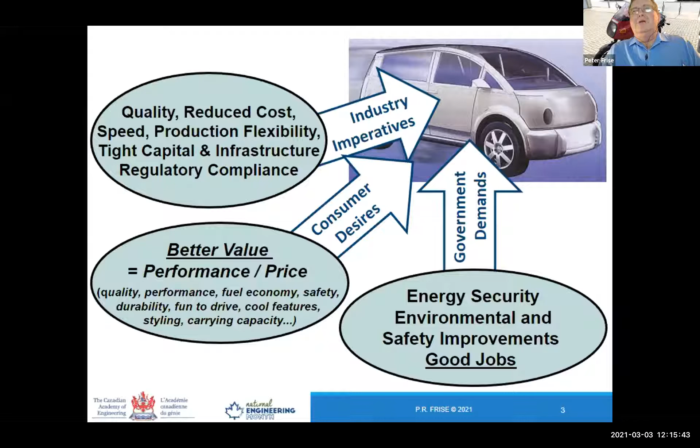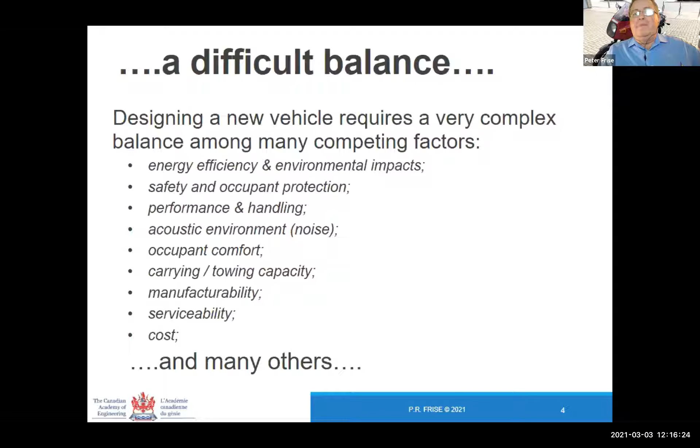So this is a very difficult balance. Designing a new vehicle is a complex balance among all these factors: energy efficiency and environmental, safety, performance, creature comforts, sound capacity, how much noise the car makes inside, its ability to tow, how easily can it be made, serviceability, and cost. These factors all have to be balanced. And of course, as engineers, this is our life. We have to balance different factors and make sure that we are properly meeting the needs of our customers.

So we're going to talk about a new term that's been coined: automobility. What is it? Automobility is the secure zero-emission movement of people, goods, and services using advanced information technologies. Automobility — we're sort of moving from the automotive industry to the automobility industry. And it's a symbolic word, symbolic of a big change in technology.

To a large extent, if you go out to your driveway, the car that's sitting there, unless it's one of the few, relatively few electric vehicles that are around, that car is fundamentally not different from a vehicle that was built 50 years ago or even 70 years ago. It has four wheels, it has an internal combustion engine, it has a transmission, body's made of steel, and so on and so forth. But the future vehicle is really going to be quite a different beast. And so people are starting to use this term automobility to symbolize that transformation.

To achieve this automobility — clean, secure, safe movement of vehicles, people, and goods — we're going to adopt four technologies. The acronym the auto industry is using is CASE: connected, autonomous, safe and secure. Some people use shared, but I'll talk about that briefly in a moment, and electrified. Connected, autonomous, safe, secure, and shared, and electrified.

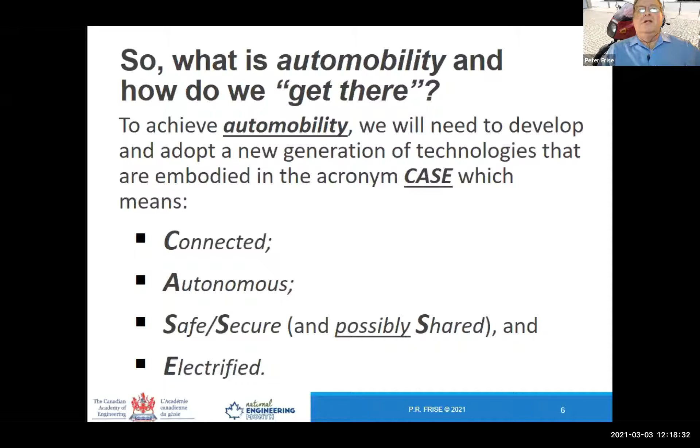Well, you and I — it's engineering. That's how it was done. It wasn't easy, but it was done. And the auto industry continues to improve.

When I give a talk like this in a public place, I always ask the crowd: put up your hand if your car has not started in the last year. And about 90% of the time, no hands go up. And I can tell you right now, if this were the 60s or 70s when I was learning to drive, every hand would go up.

Modern cars are incredibly safe. They're much, much cleaner than previous generations of vehicles, but that isn't enough. What has to change? Everything. Everything will change.

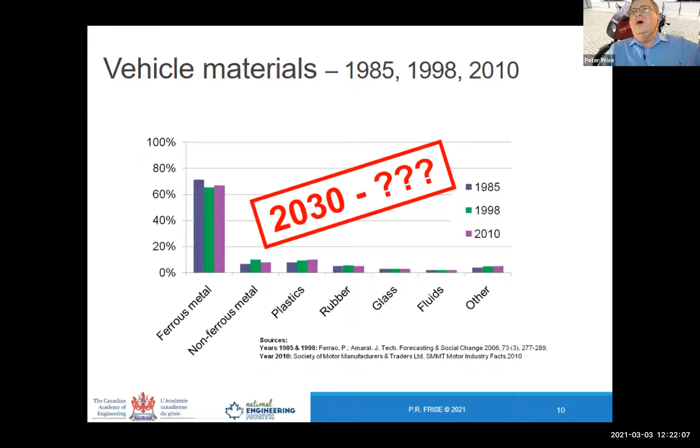And of course, as engineers, we know that if you put 2 dissimilar metals together and get them wet, you have a battery, and then you have a lot of corrosion, and that can't happen. So vehicles like the F-150 and other vehicles using a lot of aluminum, that's going to become a more common thing, which is great for Canada, because we're a big producer of aluminum, especially up in Quebec in the Saguenay Valley. It's a very exciting opportunity. And I know Christian's going to talk about the electric power system, and that'll play a big role in all of that.

The average age of a car on a North American road is between 10 and 11 years. So to replace half the cars on the road will take approximately 10 or 11 years. That's a long time. 10 or 11 years from now will be 2031 or 2032. So just because a new technology is available now, that doesn't mean it's going to be everywhere quickly.

What about batteries? Well, I'm not an expert in batteries. I think Christian may have some things to say about that, and there are a few people around who know a lot about batteries. But I'll tell you one thing, batteries are expensive, they tend to be heavy, and they can't store very much energy. But the biggest problem is the materials.

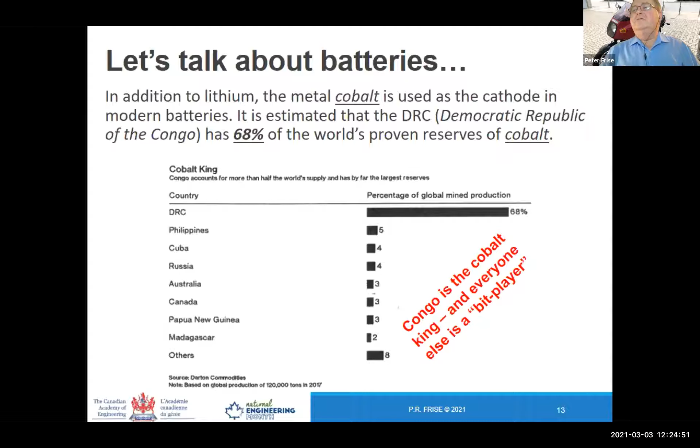How many vehicles will be electric powered in the future? This is a very interesting chart from my friends at Schaeffler Technologies, a very large German automotive supplier. If you stare at it, I think you'll understand. In 2030, about 9 or 10 model years away, the global market will be about 30% internal combustion engine strictly, about 30% battery electric only, and about 40% HEV, hybrid electric vehicle.

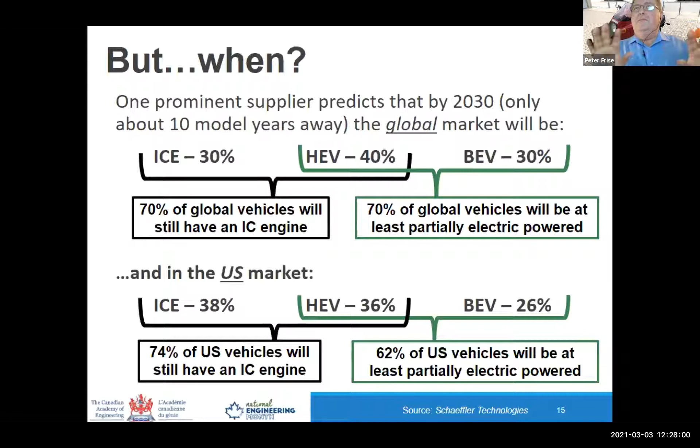Autonomous cars. Now this is the one everybody wants to talk about, and it is a very interesting and exciting world coming along. But as an engineer who works with the auto industry, it makes my head hurt when I think of some of the possibilities. So I'm not going to spend a lot of time talking about autonomous cars. I'm going to spend some time talking about what can go wrong with them. As engineers, we have to be prepared, because it's our job to protect the public where technology is concerned.

94% of all crashes are due to driver error or misconduct. We've all seen some nitwit driving too fast on the highway, or tailgating, or doing something silly. 94% of all crashes, the nut behind the wheel is the problem. How do we protect everyone from that person?

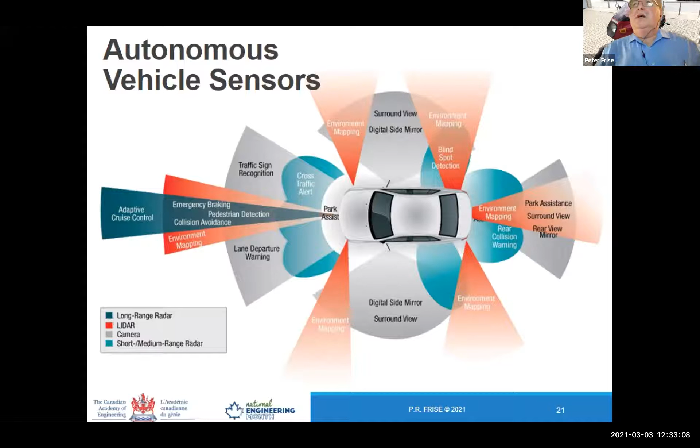Here are the kinds of sensor arrays that an autonomous car will have to have. It'll have long-range sensors for adaptive cruise control to keep distance from the vehicle in front, short-range sensors for parking assist, for pedestrian recognition and things like that, sensors at the side, sensors at the back, sensors all over the place. And they're different kinds of sensors: long-range radar, LiDAR, cameras, short range and medium range radar, possibly some ultrasonics. Each one has got strengths and weaknesses.

Somehow you have to fuse all of this information together, create a driver awareness picture so that the person in charge of the vehicle has awareness of what's going on, and you've got to keep the vehicle safe and moving, and do it in an environment which is constantly changing, and some of the other vehicles on the road are not autonomous. So they won't necessarily act rationally. They may have some crazy person at the wheel who just wants to do his own thing. So it's an extraordinarily complicated environment, and that's why it's going to take a while.

Cars will become very, very expensive. They're already getting expensive. The average transaction price of a modern vehicle in a new purchase in Canada, I think, is $38,000. I think they're going to get a lot more expensive than that when you look at the level of technology that has to be on them.

They will also become much harder to build. There's a lot of electronics in a car now, and there's going to be far more going forward. Huge amounts of software, very large numbers of microprocessors, and computing power will be required. It'll have to be redundant. It'll have to be safe and secure. This stuff is not easy to do, not on the scale that the auto industry builds.

Just to give you an idea, today in my city, in Windsor, Ontario, Stellantis will build about 1,000 Chrysler Pacifica minivans. So that means they have to have 1,000 windshields, 4,000 tires, 1,000 engines, 1,000 transmissions, 1,000 sets of wiring, and all that. And tomorrow they'll build another 1,000 vehicles. So it's an extraordinarily large industry. And just because some professor in some university can make something work on a little test track, that doesn't mean industry can build it at an economic scale in the numbers required.

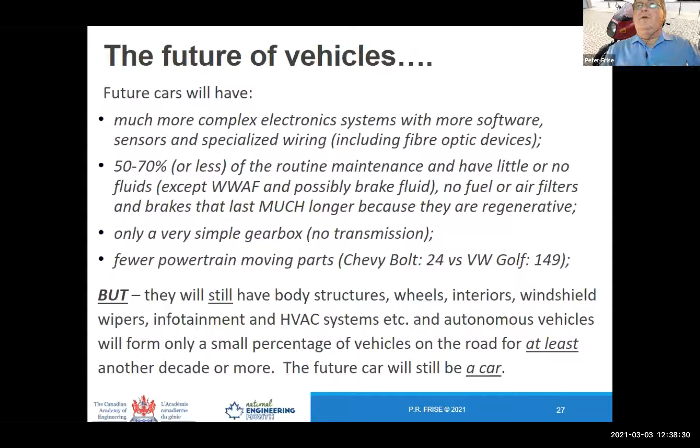And that's a very exciting opportunity. But don't let anybody tell you that we can just throw everything we have away now. That would be a huge mistake. What we have now provides jobs for a couple hundred thousand Canadians, and prosperity all the way across the country, especially in my part of the country in Southern Ontario. So the future car will still need all of those things, plus some more.

The trick is, how can we get a piece of that new action? The fact is, we build most of that stuff now. Here in Windsor, we have one of the best tool and die sectors in the world. Do we need tools, dies, and molds in the future? Yeah, because a car still will have a body that has to be stamped out of metal. Somebody's going to have to make the molds and dies for that, and the automation lines and vision systems for factories. So the world is not going to throw all that away.

But it will take a strong, determined effort on a large scale, sustained for many years, for Canada to continue to play a big role in this industry. So, just a small commercial: we did Canada's first university level program in automotive engineering in 1998, and we're developing a new program to give young engineers the opportunity to contribute to the net zero revolution and provide the necessary human resources to allow our country to take part in that. There'll be more details to follow, so watch the University of Windsor.

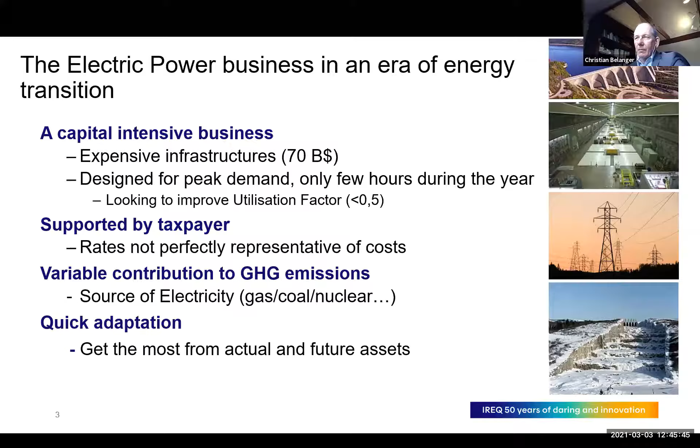There are 4 drivers for the energy transition. The first one I just mentioned is decarbonization. If we want to reach the Paris Agreement goal of avoiding an increase in temperature above 2 degrees C, we need to accelerate the decarbonization of our economy. The other driver is decentralization.

But what I mean by decentralization here is that a lot of new sources of intermittent energy will be decentralized. So you will have customers, you will have a small industry that will have their own production of electricity connected to the grid, and this will also have an impact.

Democratization is another very important point, because the customer will play a very important role in the future of the grids. What I mean here is that the customer load will be connected to the grid and will be controlled also by the grid. So that's where customer behavior will be extremely important.

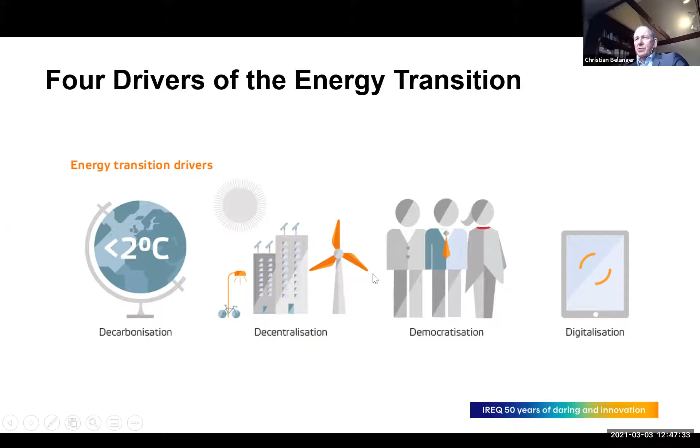And I would say the last driver is digitalization, because you cannot do that without digitalization. For example, in your home, with the Internet of Things, utilities, if you agree, will be able to control your heating system, your lighting system, and everything you agree on. So this is also a very important driver.

And all this is going to disrupt the electric system. And again, electrification - we'll look at EV vehicles, smart charging, heat pumps, all this technology which have decreasing costs - will have an impact on the electrification.

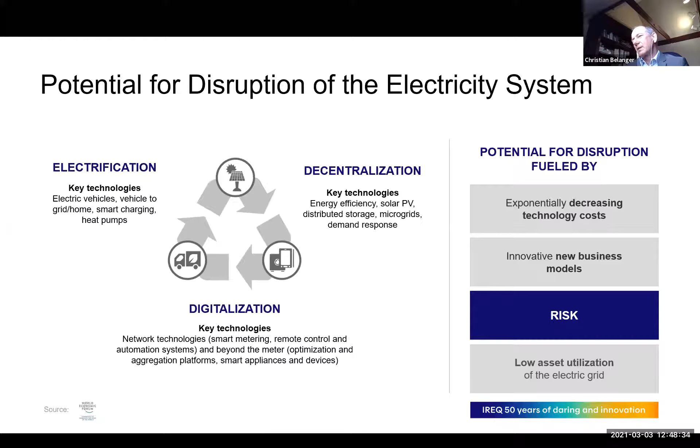Decentralization also involves key technology like solar PV on homes, batteries in the home, and very small microgrids. All this will impact the grids. And again, digitalization with smart metering, remote control, beyond-the-meter applications - the future grid will need to take all this into account, and you will have to be very proactive in order to reduce the risk of integrating all these technologies on the grid.

Now let's talk about greenhouse gas emissions in Quebec. So in Quebec today we are close to 80 million tons of CO2 emitted, basically about 10 tons per capita, which is one of the lowest in North America. You'll understand why in the next slide.

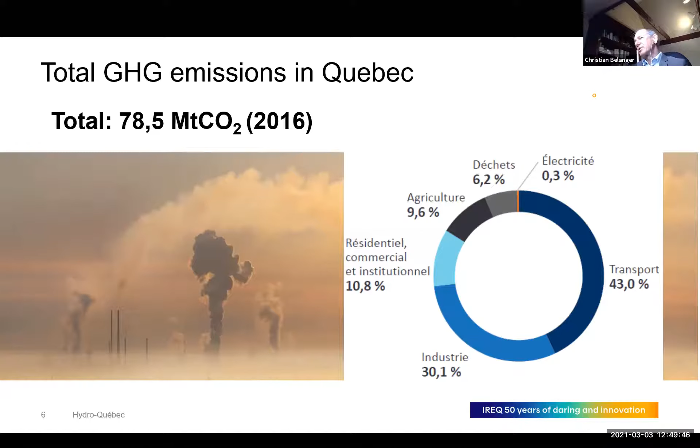If you look at the chart on the right side of the screen, electricity is very low-emitting in terms of CO2 in Quebec, because almost 100% of our production is green. Transportation represents about 43% of our emissions - maybe 22-23% is light vehicles and the rest is heavy vehicles. Industry represents another 30%, and residential and commercial is about 10% of our emissions.

Quebec has a target of reducing its CO2 emissions by 37.5% from the 1990 base by 2030, and a goal of 80 to 95% emission reduction by 2050, which is an extremely aggressive target.

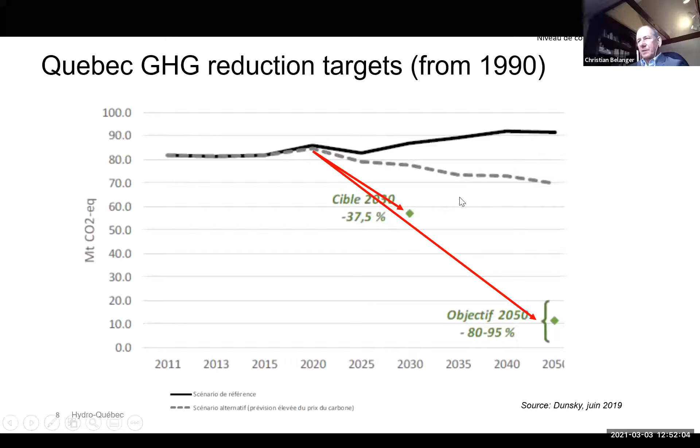We also expect that you cannot electrify everything directly, so we will need green fuel like hydrogen or synthetic fuel for some industries and processes - I'll talk about this later in the next slides.

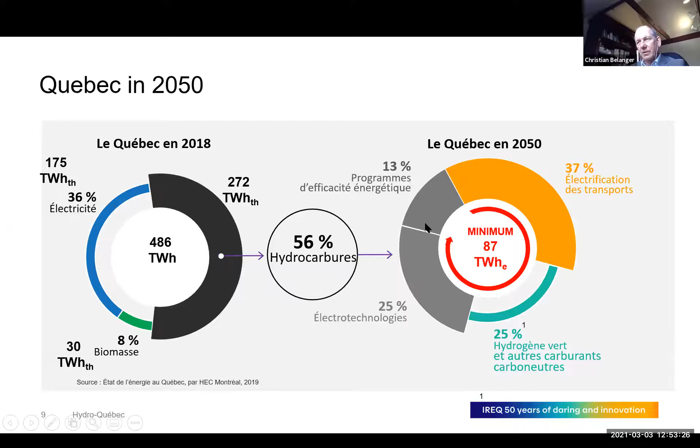A more realistic number would probably be 150 terawatt hours needed to completely electrify our economy, which means you would need to build in the next 30 years as much power as we've built over the last 100 years - which is a major challenge.

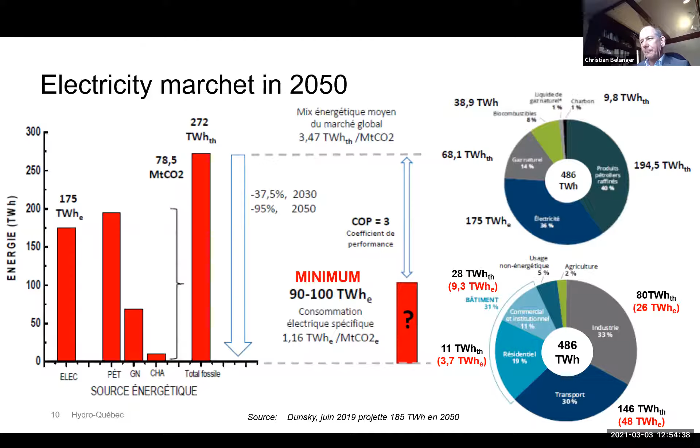So that's where comes what we call efficient electrification, based on EPRI. Basically what it means is it's a win-win-win situation. The customer is winning, the society is winning, and the utility is winning, and we're partnering in this to get a lower carbon footprint of our economy.

So how do we apply that? The first thing you have to do is look at electrifying as much as possible. Converting, for example, a gasoline car to an electric car is considered direct electrification, and it's also efficient in terms of energy. In fact, you have a factor of 2.

If you cannot do that, the next step is to use a green fuel, like hydrogen or a green synthetic fuel. And if you cannot apply that to your process, the last option is maybe carbon capture and sequestration. So you have to look at all the applications and go through that strategy for electrification.

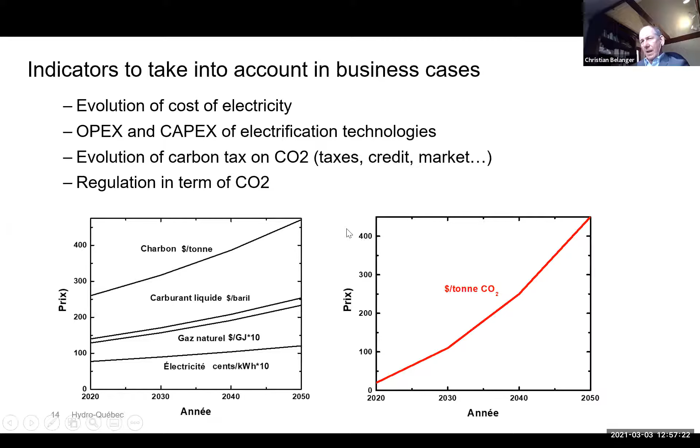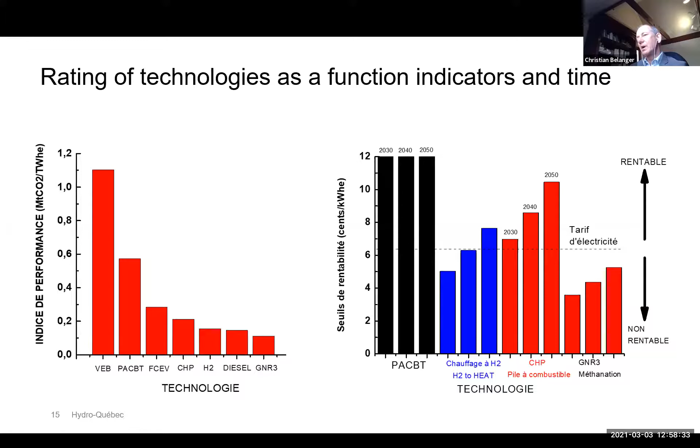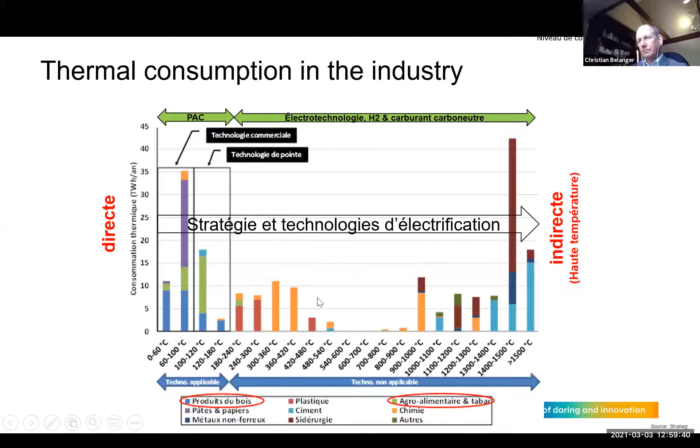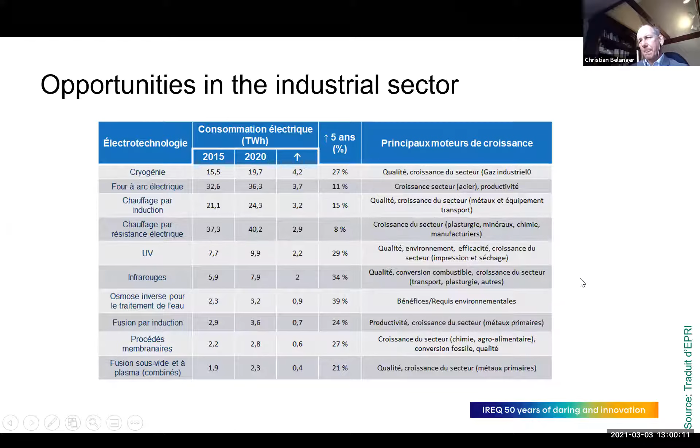An example of R&D activities we do is a pilot project going on now with a large heat pump, 2 megawatts, for a large building to replace fossil fuel. This is a demo, but we do it to show that the business case is positive. Another type of electrotechnology we're working on is wood drying by microwave, for example, for the wood industry.

Also, another type of R&D activity we do is a simulation tool for grid-friendly planning and operation for the integration of load. When I say load here, I'm also thinking of the customer load, so that it can be monitored and operated by the grid.

So these are very important activities for the expansion of the grid in the future. Example of the project we have with the large thermal pump: the federal government has a goal of having, by 2030, most of its buildings net zero, and we have in Quebec like 30 federal government buildings. We hope that the pilot we're doing with the thermal pump technology will be integrated in the retrofit of these buildings.